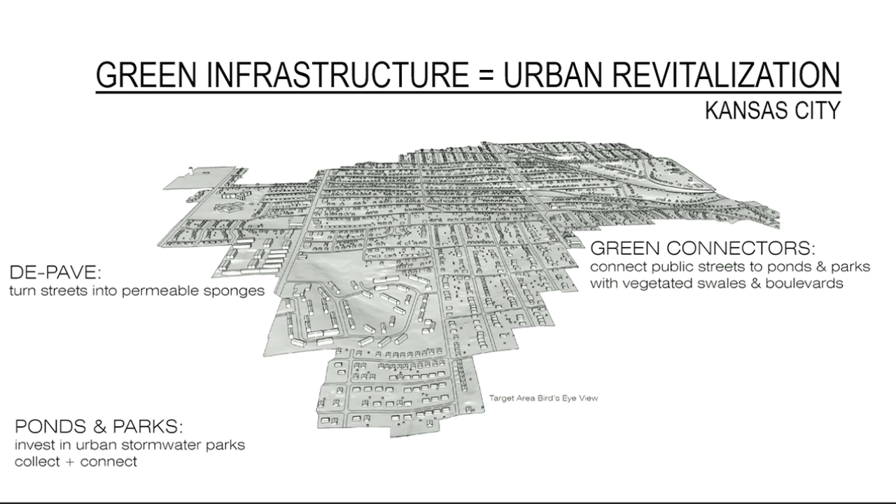Many of the first watersheds in communities around the country oftentimes are low to moderate income communities. Our first-ring suburbs are downtown suburbs because they, in fact, have the archaic infrastructure that had it combined. So this is oftentimes deferred infrastructure maintenance, and the answer has historically been just a bigger tunnel.

So the community and the city council and the leadership in Kansas City said, let's take a second and pause. We have a watershed, we have a community, but we want to look at it differently. We want to create investment in the public realm. We want to create leveraged investment of regenerative infrastructure, and we want to take this and create road diets. We want to create complete walkable streets that can connect these strategies and nodes, and we want to have them anchored in ponds and parks to create a quality of life throughout the neighborhood.

So instead of investing in a pipe that you dig up, bury, and never see again, let's think strategically through urban design and how this money can leverage community transformation. And so first and foremost, we have a series of metrics that we look at that, yes, it needs to technically work, but those balanced metrics also have to have an environmental balance, a community balance, and an economic development balance. You'll never be able to change the bean counter into a tree hugger without sustainable economics, without showing the value in hugging trees.

And so to the Marlboro neighborhood watershed that you just saw, seeing a 58% property value increase is one of those metrics. Seeing health baselines improve because of safe and healthy walkable corridors and neighborhoods, people are not afraid to go walking at night. That also ties to a 26% reduction in crime in that zip code. Those are urban design strategies that are directly tied to public infrastructure investment.

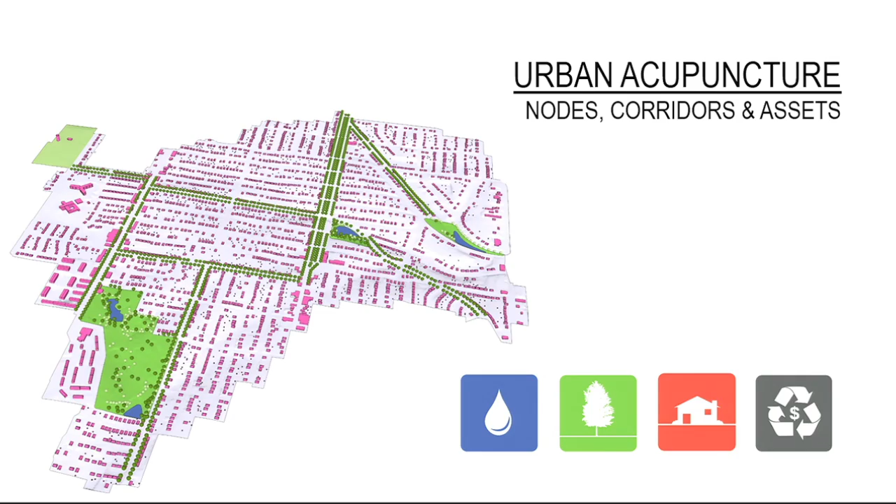So that same watershed that was proposed to have a gray tunnel now has a series of 5 miles of boulevards and interconnected bioswales that link public parks, that connect to transit-oriented development, and you now have safe, healthy corridors to promote job creation, economic development, workforce development.

And it can be jobs from the PhD to the GED. You can talk about planting plants, but you can also talk about water quality testing, water monitoring testing. EPA scientists need to be involved in this, as well as the landscaper that's just going to put plugs in the ground.

And so that idea was brought to Pittsburgh, shared with Pittsburgh, and a contingent from Pittsburgh just last year, P4, when I was asked to speak last year, came to Kansas City to see what that means. What does it mean to be 8 years ahead of a consent decree and see built things? What does it mean to see some of these neighborhoods starting to thrive again and take ownership in that neighborhood while building wealth, but not building something to displace them?

And so we were asked to be a part of a very healthy team and robust team here in Pittsburgh, led by PWSA, Mott MacDonald, engineer of record, Arcadis, Christine Mondor with evolveEA, and then we also were asked to look in a deeper dive into a series of your regional parks with the Pittsburgh Parks Conservancy.

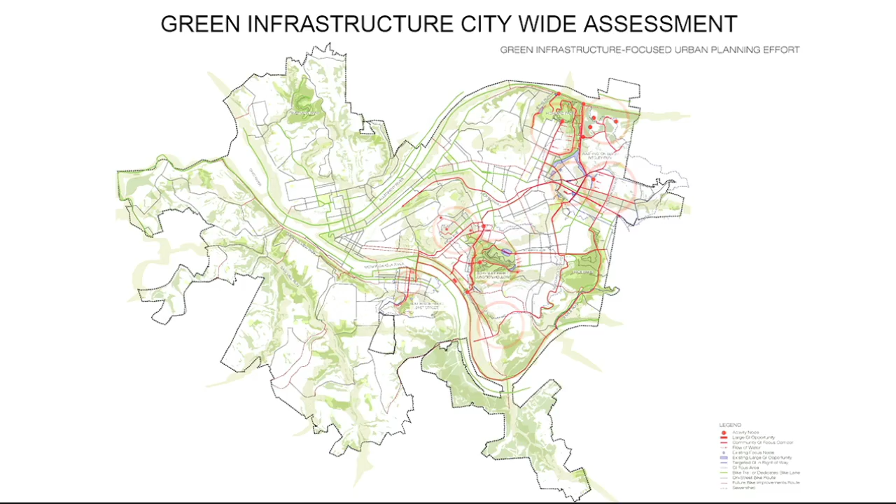And so this diagram that you're looking at is a watershed map of the city, and you'll start to see the 3 priority watersheds that we were asked to look at, and that was Southside Park, 21st Street. That was Four Mile Run, which really drains right through Schenley Park down to the proposed Almono site, and Washington Boulevard, Negley Run on the other side of the city, which has most notably some significant losses of lives tied to stormwater and flooding. And so these are very serious matters that have to be addressed. It's not just about a basement backup every now and then.

So first and foremost, we developed a concept that was to develop a green infrastructure first urban planning process. We didn't want to get into an argument about tunnels versus green. We just wanted to put blinders on, look at an urban design framework in these watersheds that can provide catalytic community development through these strategies and invest in the public realm. Because otherwise, a lot of these planning documents that are emerging from the community would likely sit on the shelf for a long time.

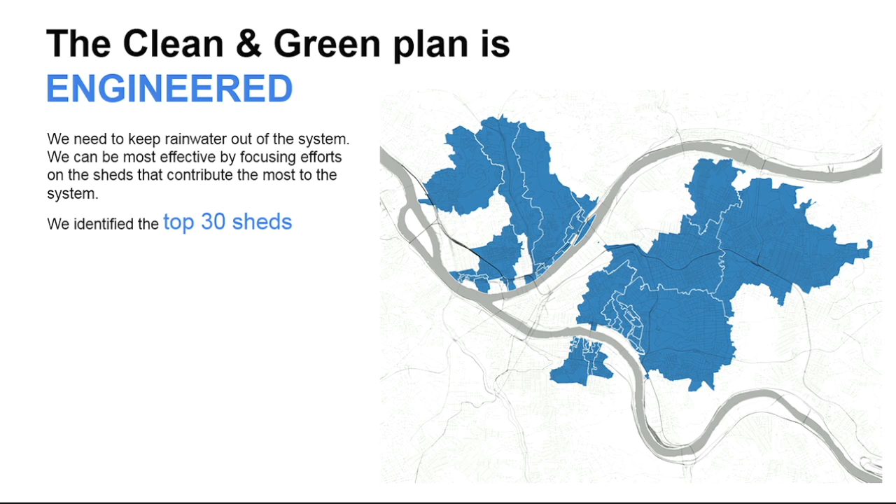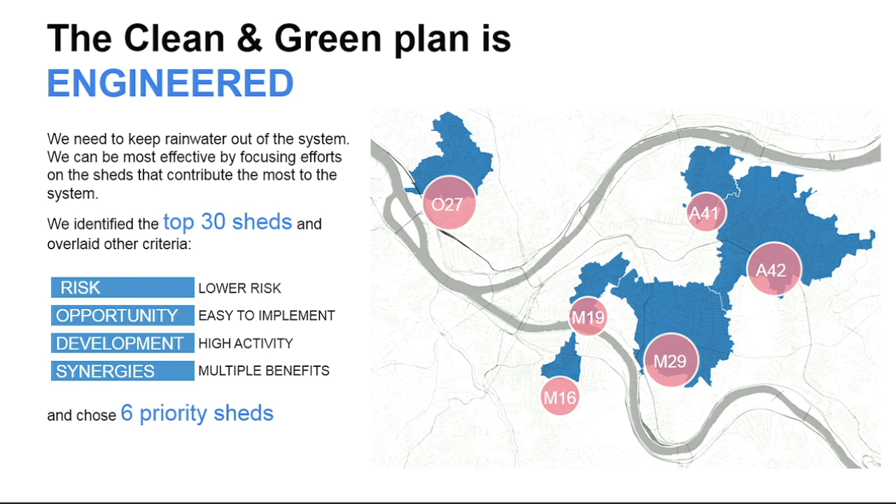What we found and what the engineers found in the city of Pittsburgh is similar to an 80-20 rule. 80% of the problems of runoff are actually coming from 20% of the watersheds. And when you distill that down, you can start to prioritize what watersheds you need to focus on and what watersheds have the biggest yield of runoff, and that means the biggest bang for the buck to be affordable. And so we started to also help identify what these ones had, how you could reduce risk, how you could increase opportunity, promote development, and then how all these things could be synergistically tied together through planning and urban design.

But it's really about collaboration. It's really about building a team of folks that understand how to collaborate, how to share crayons, but they're ninjas in their own field. They can bring this together and make it happen to first develop a set of guiding principles for this project. And these were shared with everything from the upper leadership in the city all the way down to the communities we worked in. Public realm investments have to be cost effective.

Each one of these green infrastructure projects need to have workforce development opportunities. They also would want to redevelop and reestablish the riverfront connections for Pittsburgh with a complete streets and a healthy walkable community approach. All in all, in our time of climate change and regenerative infrastructure, to be more resilient, because we're finding that 50-year storm events are happening every 2 years. We can't treat water and rain like we did for the last 100 years for the next 100. We have to think differently.

And so with that, I'm going to give a deeper dive into the 3 pilot projects with a little bit more focus on 4 Mile Run. So our process, once again, starts with urban design. It doesn't start with the engineering. It starts also with recognizing the amazing regional parks you have in the city that are highly underutilized in terms of stormwater infrastructure and an ecological footprint that really needs to be restored a bit.

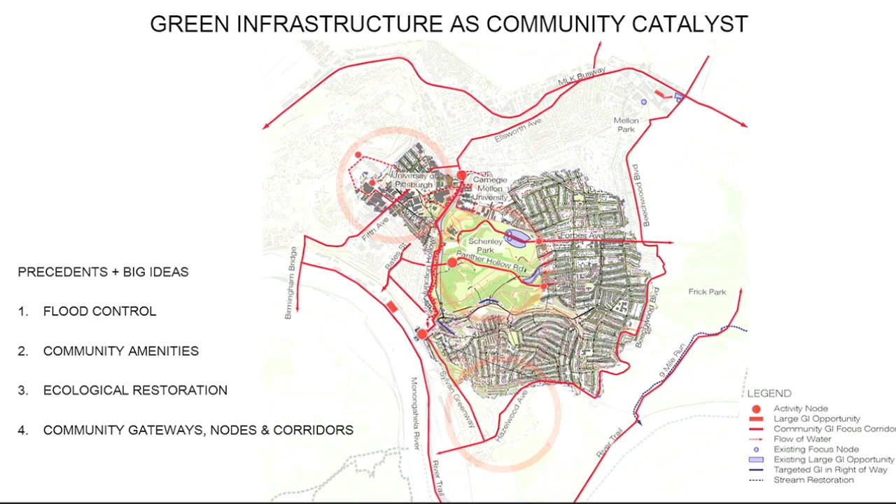But we heard very clearly we need to deal with flood control. We need to make these about community amenities, about restoration of the ecology in place, and reinforce community gateways, nodes, and corridors. Well, instead of looking at it as a reactive approach of, hey, this inlet floods, let's put a rain garden right here, we looked at it as a proactive strategy of urban design that can then quantify build-out moving forward.

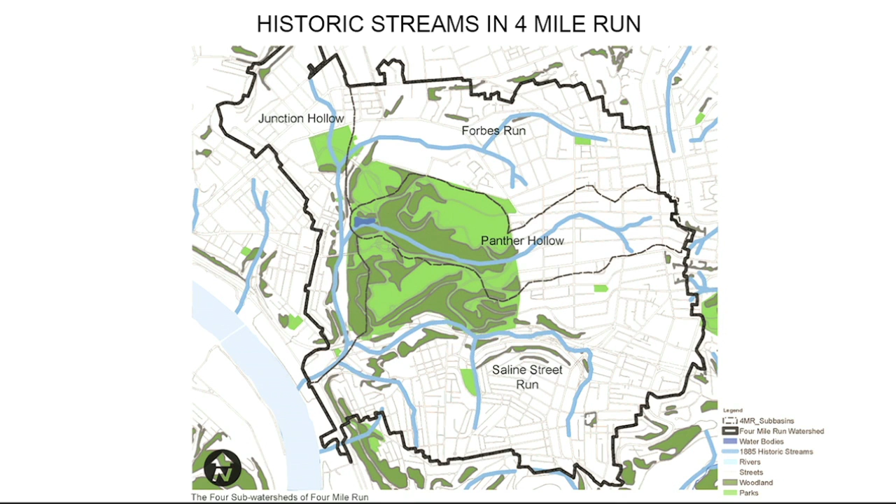But when you take a step back, this is a diagram of the historic streams in 4 Mile Run that go through Schenley Park. Panther Hollow Lake and Panther Hollow Run right now drain about 80 million gallons annually of fresh water into the lake that overflow into your combined sewer that you then treat as if it was wastewater. There's a cost to that. That's how you start to convert the bean counter into a tree hugger, when you can show how much that costs, that you're just wasting it and putting it back into a pipe.

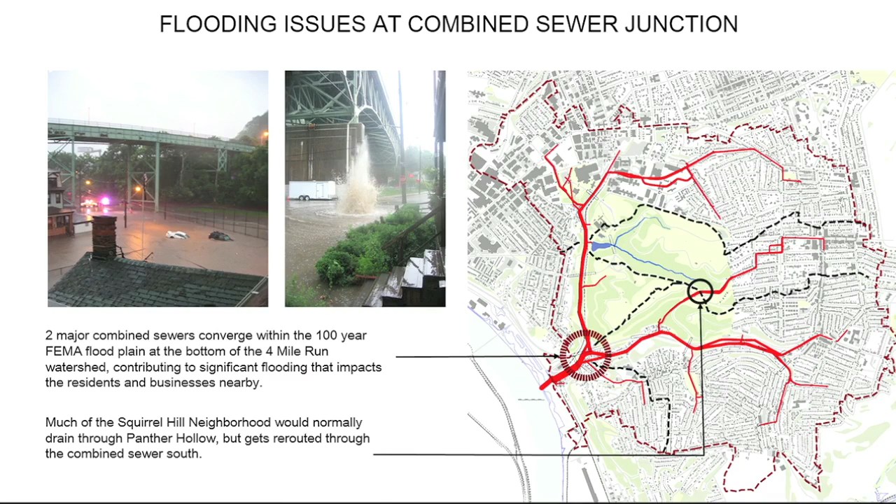So how can we alleviate that conflict, that big circle where these pipes come together? The top of the watershed, the green, drains to the north through all the institutions, down around and into the Hollow, into a pipe. Squirrel Hill and the areas in yellow and kind of tan drain to the south, and they come back to that confluence. So we need to reduce water before it hits that confluence. We need to keep it out of the pipe.

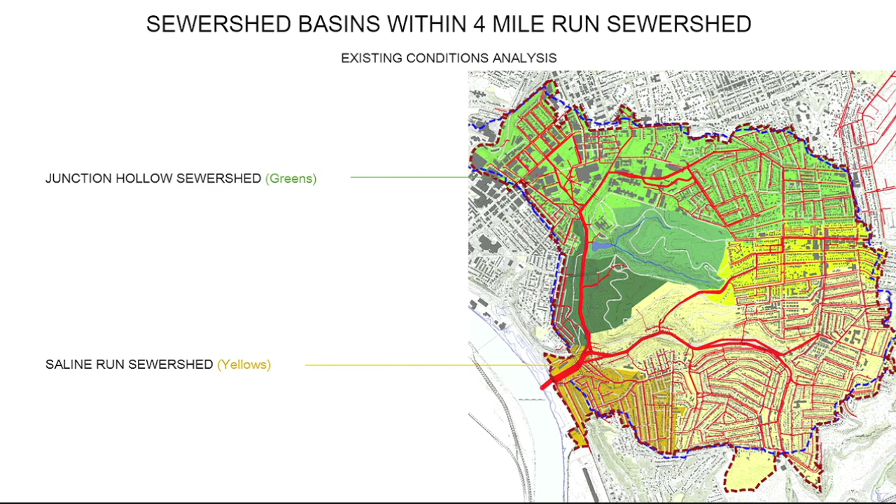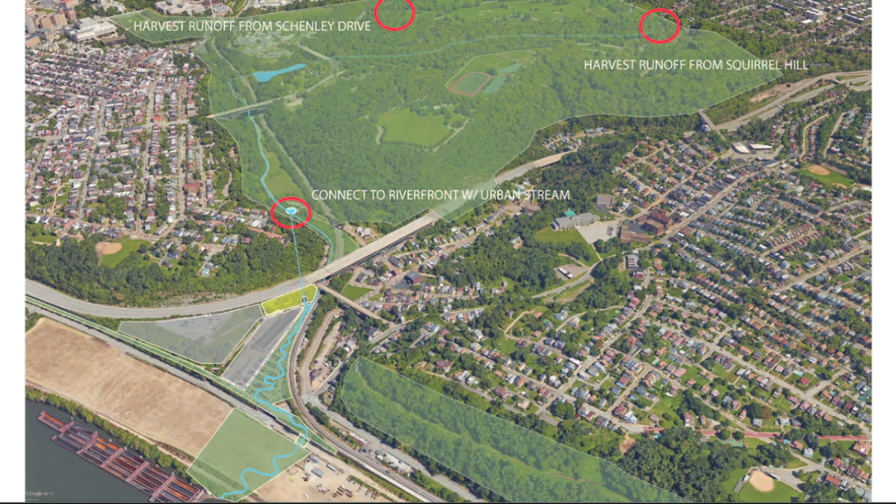So from a Google Earth, just a diagrammatic perspective, we need to harvest water up in Squirrel Hill. We need to harvest water from Schenley Drive. We need to connect some areas that have some flood opportunities and figure out how we reinforce that connection to the river. Well, that's exactly what we did. And the concept said, let's take Squirrel Hill off the grid, and let's turn their stormwater drainage before it gets into the pipe into the Hollow and into the park.

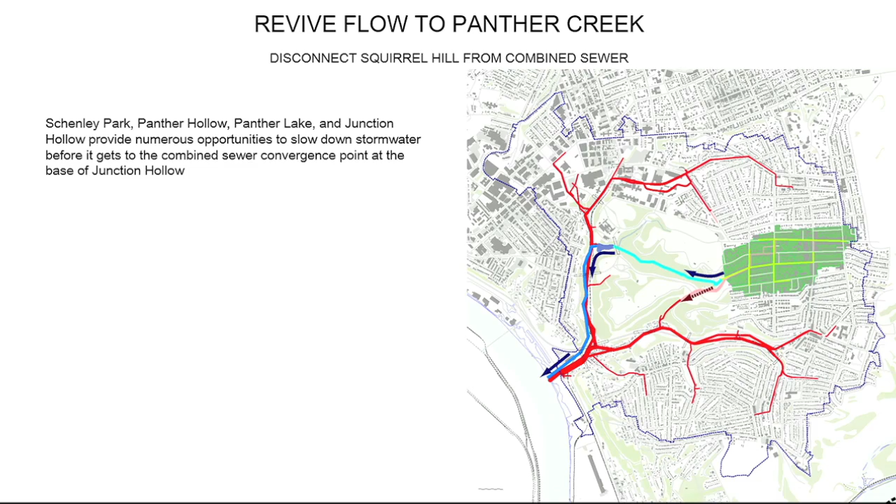And let's daylight that stream of 80 million gallons of fresh water and create a meandering stream and a concept that is in the engineering world called strategic sewer separation. We've now removed in excess of 22 to 25 million gallons of rainwater every time it rains, and we're proposing to create an interconnected natural systems park-like corridor where people can walk through here, bikes can ride through here, but more importantly, stormwater isn't forced back into that pipe to create those flooding events.

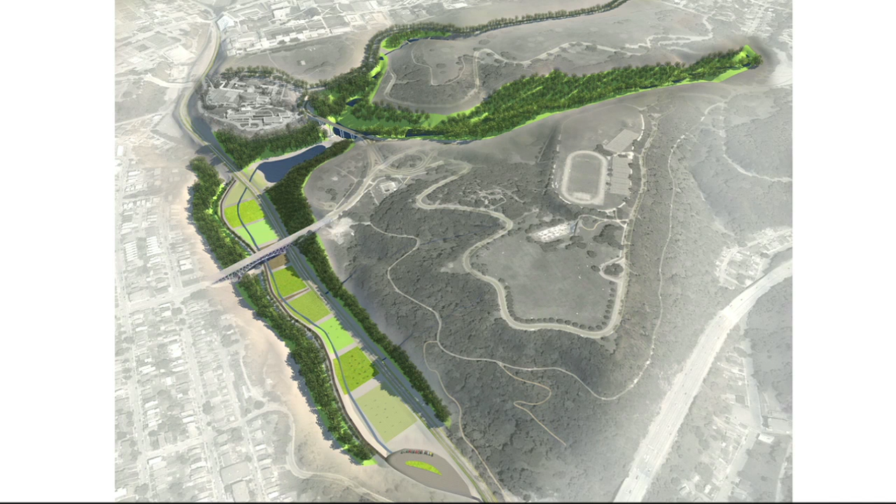That's one of the quick renderings of what that would look like. And that's a comparable cost to that of a gray tunnel solution that frankly won't solve any of the flooding issues, and you won't see it once it's buried 200 feet below this landscape. Imagine those green patches. Some could be wetlands and outdoor classrooms. You could have more soccer fields and put the storage of the stormwater underneath.

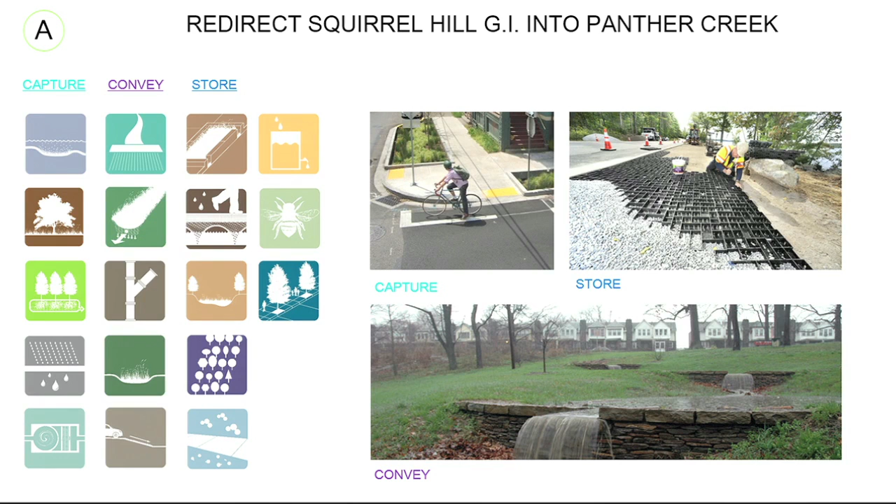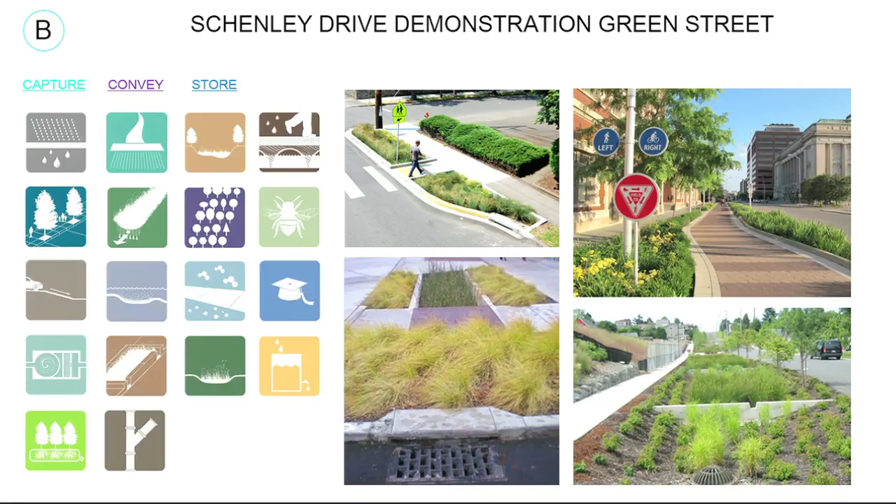They can look like this, and I don't know if everyone knows what green infrastructure looks like, but you can use your roads as your stormwater collectors. You can put bump outs for traffic calming. There's a very large kit of parts for green infrastructure, whether it's in the park and terraces, or it looks just very urban, like Squirrel Hill. That's going to be a very urban condition. We can only put pervious concrete or skinny bioswales. We can't put these big meandering streams in Squirrel Hill because it's built out. But we just need to apply a different kit of parts to that ecosystem.

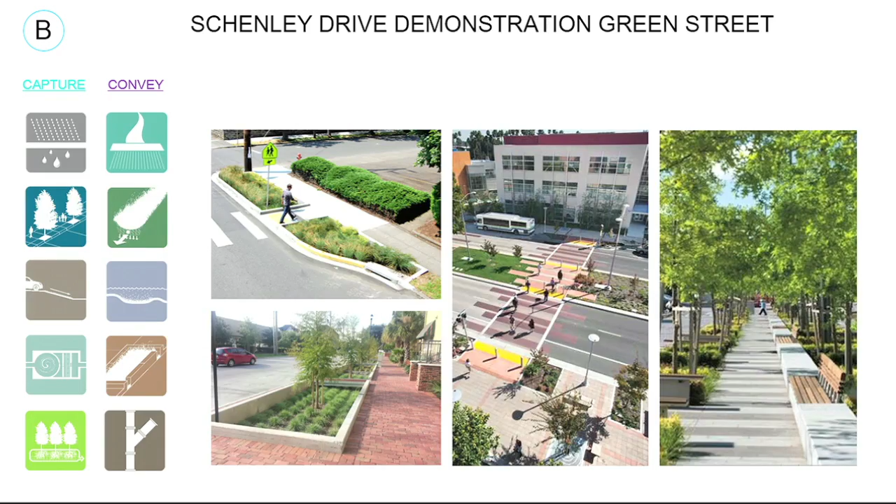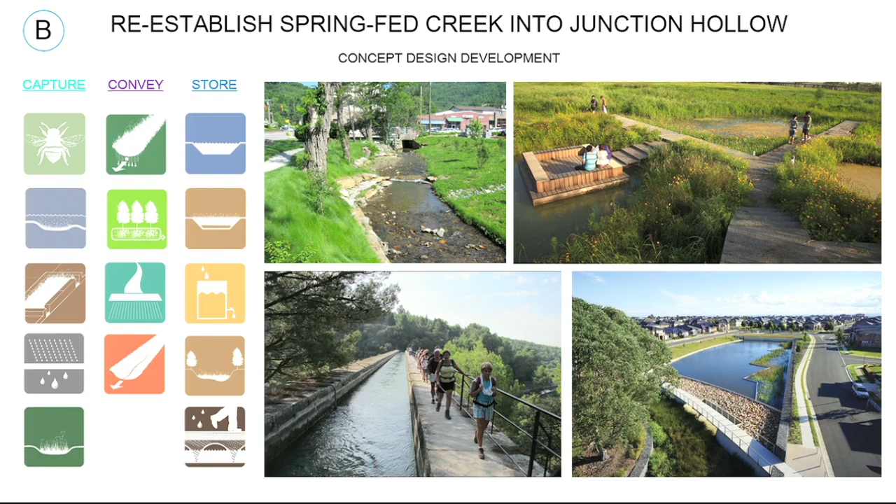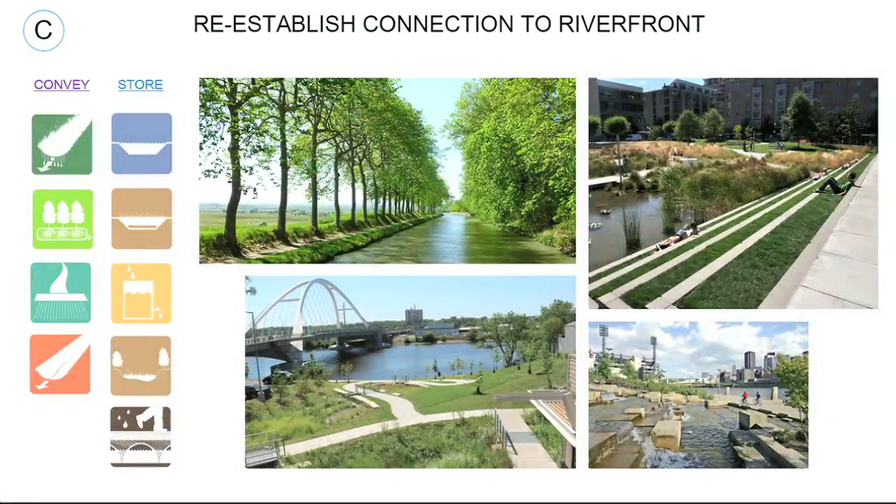Schenley Drive, similarly, these are public realm amenities that will also revitalize and elevate the public realm community. The Junction Hollow can look natural and woolly and fuzzy. It could also be rigid in geometry and contemporary. The aesthetic, frankly, comes from the neighborhood and the community. That's a design process. These are what green infrastructure projects should be striving to achieve within this country, and especially in Pittsburgh.

Washington Boulevard, Negley Run, same process, different outcome. Washington Boulevard, Negley Run, interestingly enough, has an asset of a VA campus, a youth detention center, and major green infrastructure opportunities that can be about workforce training and development. It also has a very sizable transit hub, which equates to asphalt, concrete, and runoff. You have a regional park with Highland Park just also connected to that.

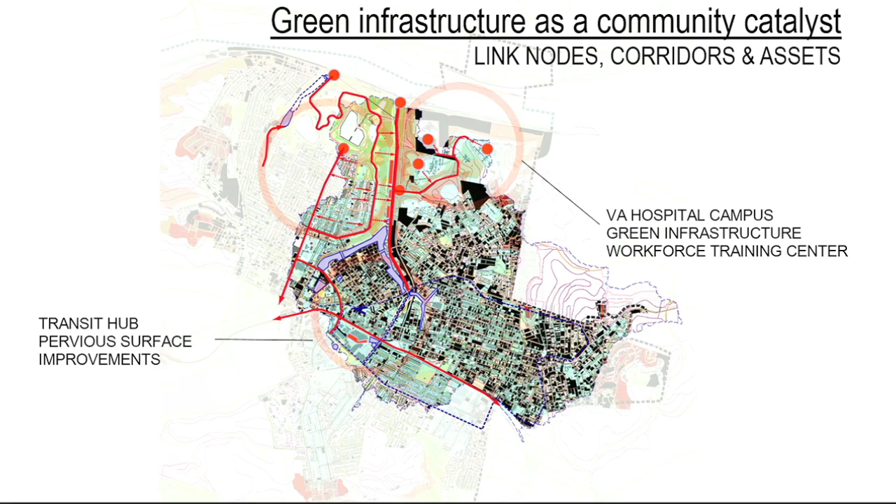So how can, through urban design, we link those assets, create healthy walkable corridors to promote everything we're talking about, but give the infrastructure program so it has regenerative outcomes, so it doesn't just technically work, but it promotes economic development. It incorporates community engagement and revitalization, and it's a sustainable showcase that is much more resilient than just simply a concrete pipe.

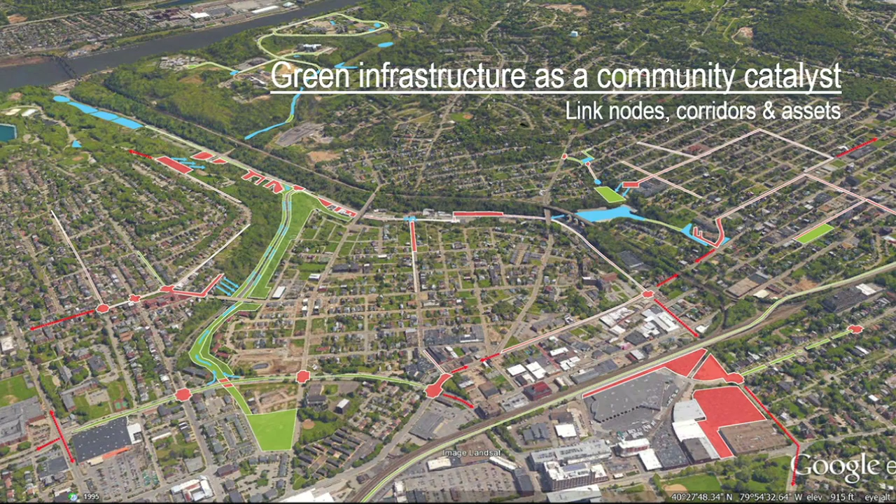Now you start to look at what this graphic looks like. This diagram, we're looking at kit of parts where red or pink are pervious pavement systems. We're looking at large bodies of blue as large ponds and lakes. So restore Silver Lake around Westinghouse Academy. Pull that water and capture it before it goes down Washington Boulevard and causes flooding.

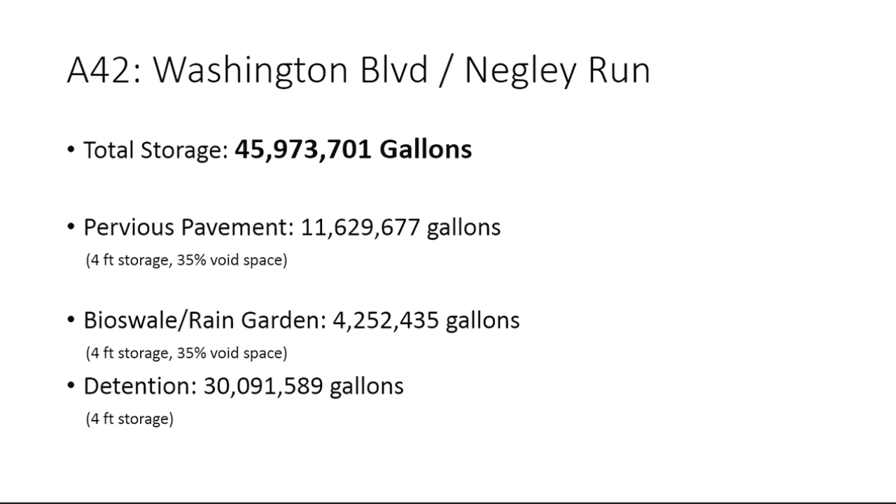Create flood control opportunities in the parkland adjacent to Washington Boulevard, but treat it as a whole system so it doesn't hit that pipe and do the same thing it does in Schenley Park and the bottom of the run. That system removes 45.97 million gallons every time it rains. 45 million gallons removed from that watershed every time it rains.

Southside Park, same process, different outcome. Has an underfunded neighborhood park. And so I'm going to make a park pledge here. You need to figure out how to deal with your neighborhood parks, just in general. There's a lot of opportunities here.

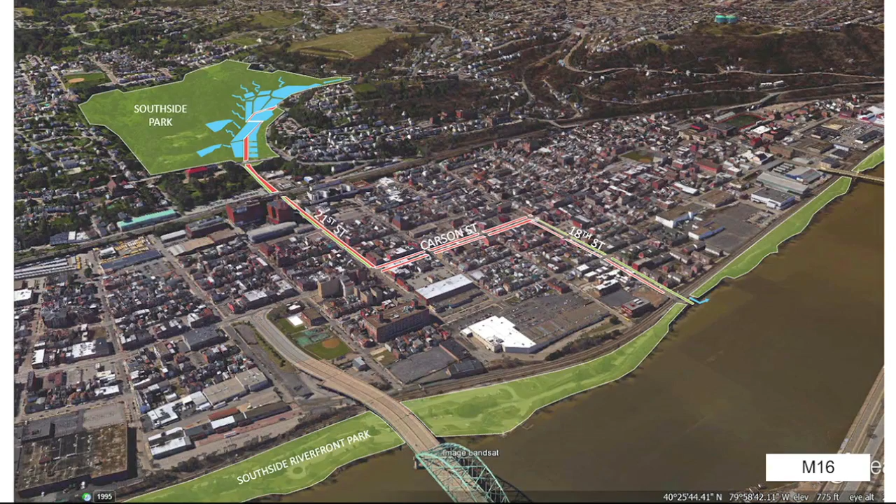But for the bean counter, the biggest cost in this watershed is the silt and the sediment that they have to vacuum out of pipes every rainfall event, because this hillside and these parks in this area are old strip mines that erode every time it rains. So you need to solve that problem. Well, 21st Street had been a very interesting corridor of study for a long time around stormwater management. Carson Street is a mixed-use viable corridor, and 18th Street is what gets you to the pedestrian crossing to the river.

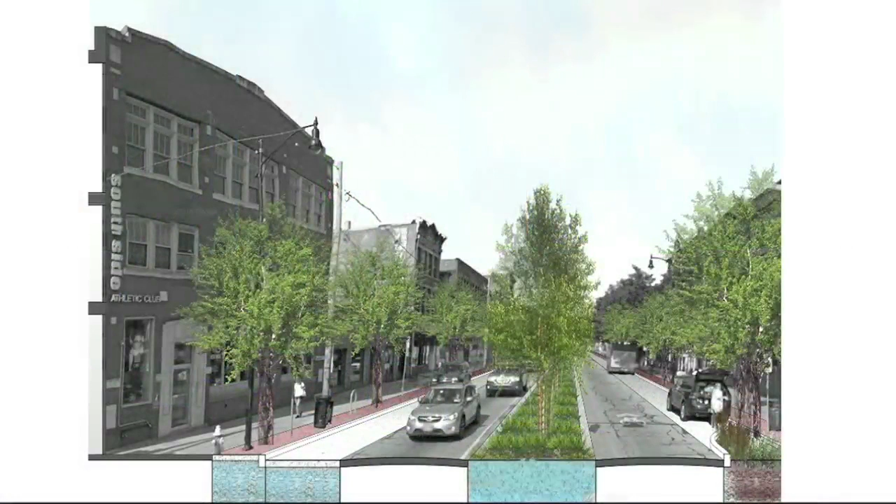This system right here, simplistically diagrammed, looking at Carson, we're not talking about reinventing Carson, but we can fit a bioswale down the middle of the street, and we can put pervious pavement where they park. That can be subsurface storage. That can be public realm improvements for a mixed-use area that may want a facelift. But more importantly, that system then removes 37.981 million gallons from the watershed every time it rains.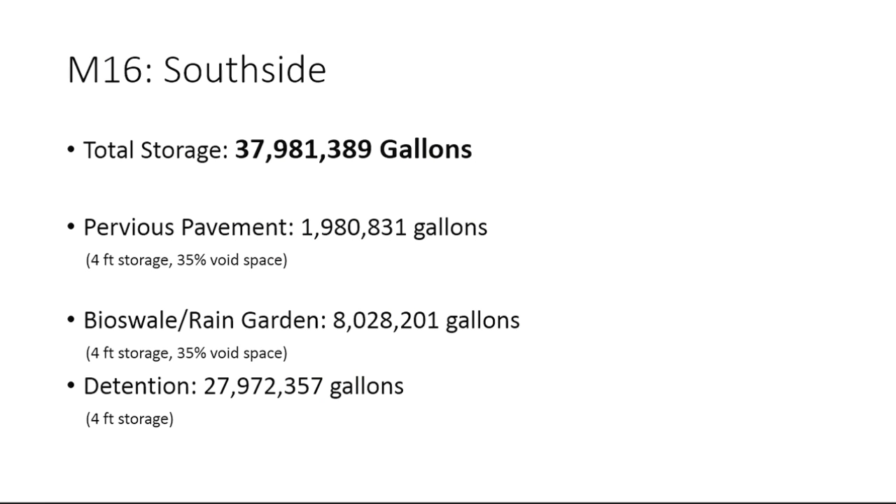So if we truly want to overcome blight and disinvestment, to create regenerative infrastructure solutions as a group, we need to create a holistic approach that looks at strategic, node-based, transit-oriented community development. Those little series of buzzwords are how you can get complementary funding from DC. That's how you can leverage other departments of funding mechanisms around one bigger vision. We need to lobby for change.

You need to prioritize community-based planning, so it gets integrated into these as opposed to draped on top of and just given lip service, because the community won't take ownership in something that they're not involved in. And then define innovative pathways towards this implementation, so you're leveraging housing dollars and transit dollars and infrastructure dollars to create these healthy, walkable communities that then get crime reduction opportunities and health baseline opportunities to make this thing sustainable.

And so I hope I didn't make it as gross as it could have been before lunch. And I wanted to thank everybody today for a couple reasons. One, to be in a room with adults is overwhelming right now. I've spent the last 4 days with 9 to 10 kids in Disney World, and I flew in this morning, and I almost went straight to the bar, but I said, no, I have to come here and speak. I have to be sober. I can't do that, I know.